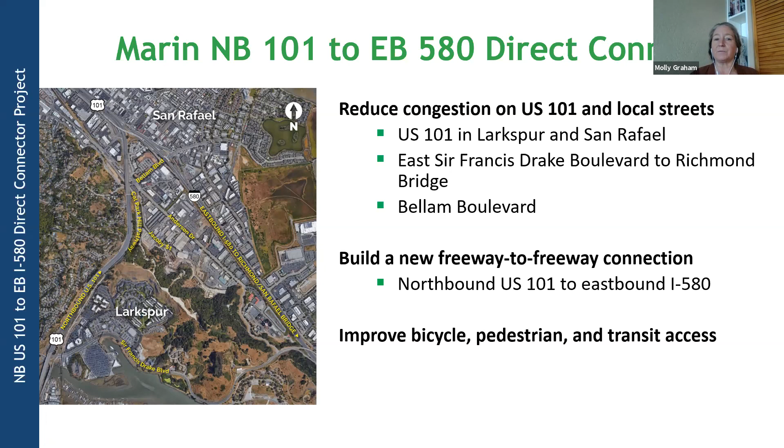This project has been under consideration for a long time. The Richmond-San Rafael Bridge is a toll bridge, and it's one of the only toll bridges in the Bay Area that doesn't have a freeway-to-freeway connection. Funding was secured both in our local tax measure and for Regional Measure 3. The upcoming work is to identify alternatives and do a very thorough environmental analysis. We are even pre that phase, doing outreach and talking to folks before that is important, and we will continue the outreach as we go into the environmental process.

Sorry, Dan, just backing up - we have engaged a stakeholder working group. Kate, thank you for being part of that, and Linda Jackson, I see you're here as well. I'll go into more details on that. We're working with Caltrans, and also part of the project is to develop conceptual, high-level design work for the opposite connection, which also doesn't exist: westbound 580 coming into Marin, and then southbound 101.

All right, Dan, thank you. So this is the targeted project schedule. As mentioned, we are currently in the project development phase, working on consensus building, and then environmental scoping, which is the term to kick off the environmental process. That would occur later this year. Once that's finished, you determine a preferred alternative, the design that would be built. And then ultimately, final design and construction, shown in the box in green.

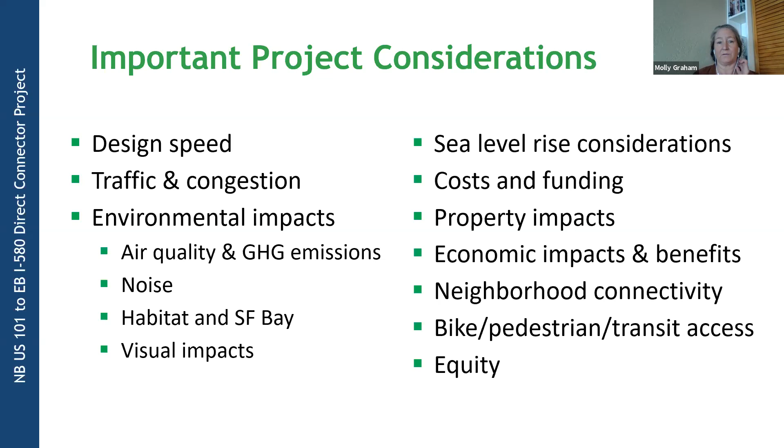I mentioned a little bit of this earlier. The project funding, Regional Measure 3, was voted on throughout the 9-county Bay Area for toll bridges to provide additional funding for specific projects, and this is one of them. $135 million was approved in that, and unfortunately Regional Measure 3 is held up in litigation right now.

It's with the California Supreme Court awaiting hearing, and ideally all that money, which is being collected and held in escrow, will be resolved in the near future so we can have that $135 million to contribute to this project. There's also local funding from our local sales tax, also voter approved, about $16.5 million for our local efforts and interests.

And I think from here, do I turn it over to Dan? Yes, now we get to what I call the spaghetti map — the alternatives that we have, there are 7 currently being considered. So Dan, I'll turn it over to you, and thanks everybody again. Thank you, Dan. Molly, take it away.

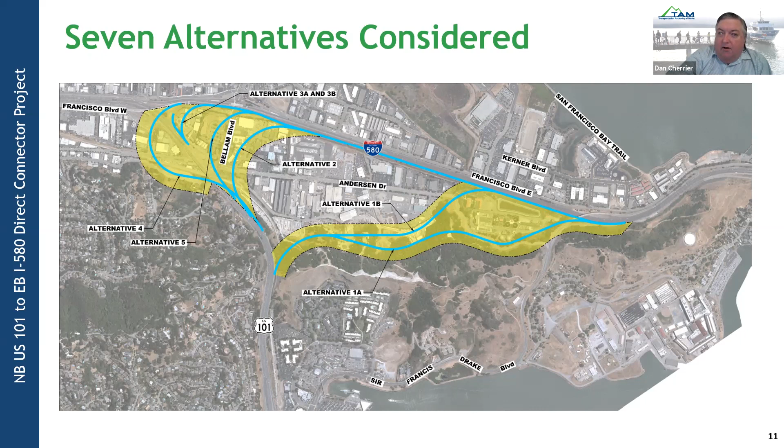Alternative 1A starts off at the top of Cal Park Hill. It goes across the hillside. It has to cross over a roadway that accesses the hillside. Anything in orange is a bridge structure, anything in green is on the ground. Obviously a lot of deep cuts and deep fills here. It goes to the east of the sanitation district, and then goes on to I-580 after that.

One thing about all 7 alternatives we'll be discussing here is they all have an auxiliary lane on I-580 from wherever the alternative joins 580 to join the current auxiliary lane that comes on from Sir Francis Drake to approach the bridge. That's the right lane as it approaches the bridge, all the way onto the bridge. That means the Sir Francis Drake on-ramp will revert to being a standard on-ramp with a normal merge.

So this is 1A. This structure, this one orange structure over here on the left, as you can see in the profile view, is 60 feet from the bottom of the road - from the top of the roadway surface to the bottom of the bridge structure - and then a 20-foot high bridge over Anderson. What you're seeing here for the cuts and fills, we have exaggerated the vertical scale so you can actually see it.

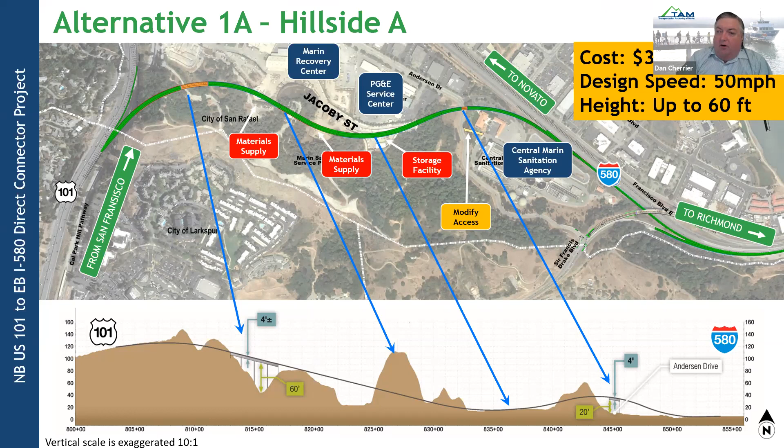So here, that arrow to the right shows where that first bridge structure is, and then it winds behind MSS, which is the Garbarino recycling facility, and this is what the right half of it will look like.

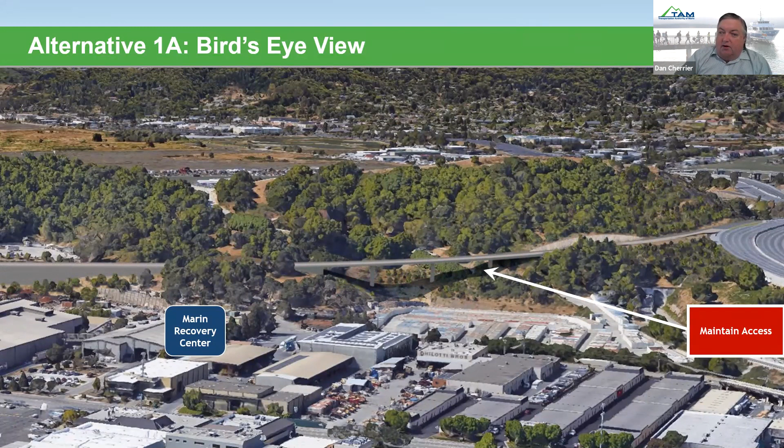Alternative 1B is further up the hillside. We did this for a couple of reasons. One was to see if we went further up the hillside, would it have less of an impact on the MSS facility? We don't want to go all the way to the top of the hillside because then it can be viewed from the residences that are on the opposite side.

And then it goes on the other side, as you can see, of the Central Marin Sanitation Agency. It now goes on the west side, so it'll have less impact on their operations. It will touch down to 580, unfortunately, right where the Sir Francis Drake on-ramp is right now, and off-ramp. So it will necessitate rebuilding both of those ramp structures, and we'll have to realign slightly how Anderson comes into Sir Francis Drake.

The actual structure over that roadway on the far left there, right after it starts, is a little less high because you're further up the hill. You don't have to span as much height between the ridges because you're further up the ridge. When I say it does have less impact on MSS - otherwise it's pretty much the same thing. It starts in exactly the same place.

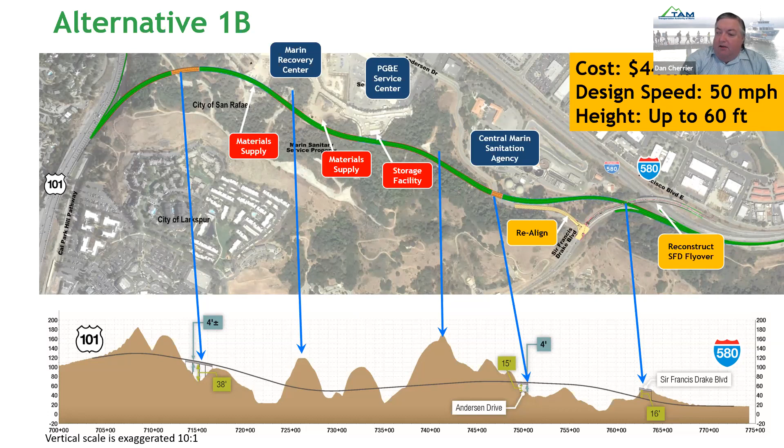Here is a photograph of kind of how it looks, and we'll go from there.

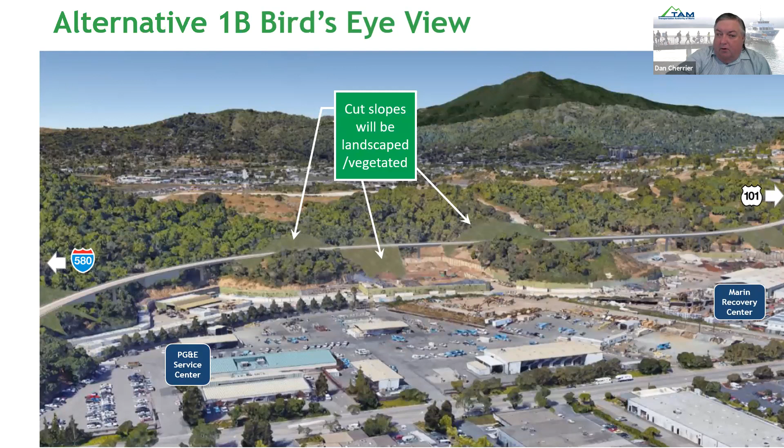Let's see, this is how both of them take off from Highway 101. This is northbound Highway 101, this is northbound Highway 101, and they would both pretty much start in the same location. But this kind of gives an idea of how they would take off.

Both of these are the highest cost of all the alternatives, and they probably have the largest environmental impacts because of the habitat and species and other resources that are up here on the hillside. So moving along to alternative 2, this is the one that goes down Simms Street.

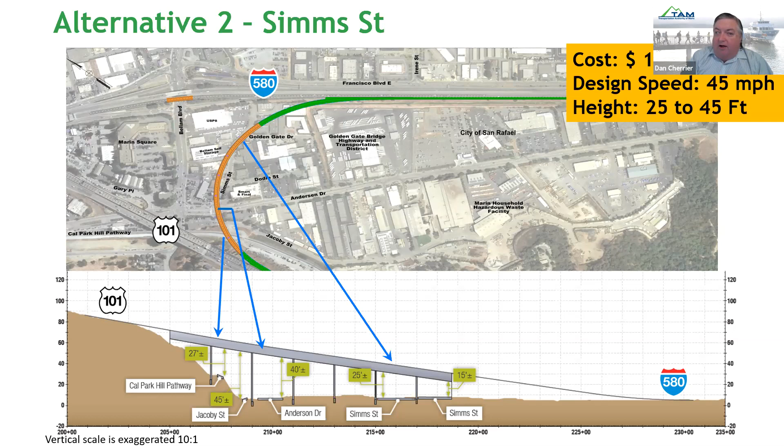Plus, it's right on the side of Simms Street, so you can see that coming all the way down. It does have a long structure section, pretty much all the way from before the train tracks to practically where it is going to go to I-580. Here's a photograph of a rendering of it crossing the train tracks and the bike path before Anderson is off there to the right. Like I say, it's pretty high where it crosses over Anderson.

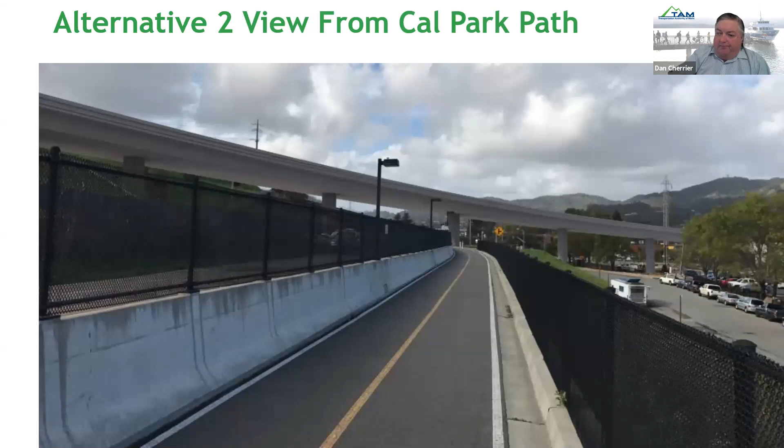The next view. Next alternative is 3A. Call this the low speed A. The reason we call it low speed is as you're coming down the hill here, the space you have to get turned around gets tighter and tighter, so the design speed gets lower. Well, we have a table after all of these that'll show how the design speed works, but basically it goes just east of the current Bellam Blvd off-ramp. You see that the Bellam Blvd off-ramp off to the far left.

What would happen is you'd have a double lane exit. All these have a double lane exit. And then the Bellam Blvd off-ramp would go off to the left of the direct connector shortly after the gore point. It does have an odd profile because it has to get high enough to go over the I-580 exit to Bellam. So the highest part of the structure is actually where it crosses the I-580 off-ramp, not where it's crossing Bellam itself. So it gets kind of a weird profile in that it raises up fairly quickly and then starts dropping down the rest of the way, including the part over Bellam.

Like I said, one thing is an auxiliary lane, no matter which one we start, happens at wherever the touchdown is. So in this case, that third lane going eastbound I-580 would start at the moment this will touch down. And it does have a non-standard feature in that Bellam Blvd comes off on the left of the ramp. So the structure over the Bellam Blvd off-ramp, as you can see, is about 16 feet over that structure, which is the minimum required by highway standards.

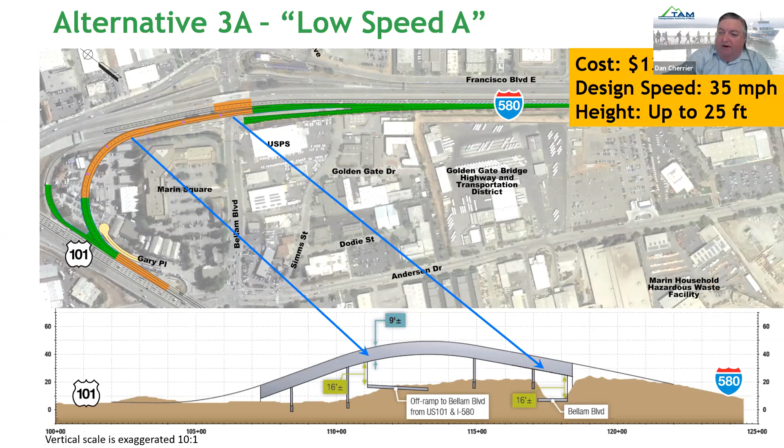One thing you will notice is an extra set of orange over here, and we'll get to this in a minute, but no matter which option we're doing, the Bellam Blvd undercrossing structure, where I-580 goes over Bellam, is going to be replaced to match, if you remember, TAM about 12 years ago replaced the westbound structure, and we were able to get rid of the column in the middle and widen out this structure. So no matter which alternative we do, it will have that one thing done, even if it's up on the hillside. So here's kind of a picture of what that would look like.

You can see the Bellam Blvd off-ramp going to the left of the direct connector. And you can see that there are some right-of-way impacts. That part in green, that little grassy area, that is currently owned by Caltrans and leased to some businesses that are back there at the end of the Gary Place roadway. I think there's a place that makes masonry tile and a couple other businesses that would be impacted.

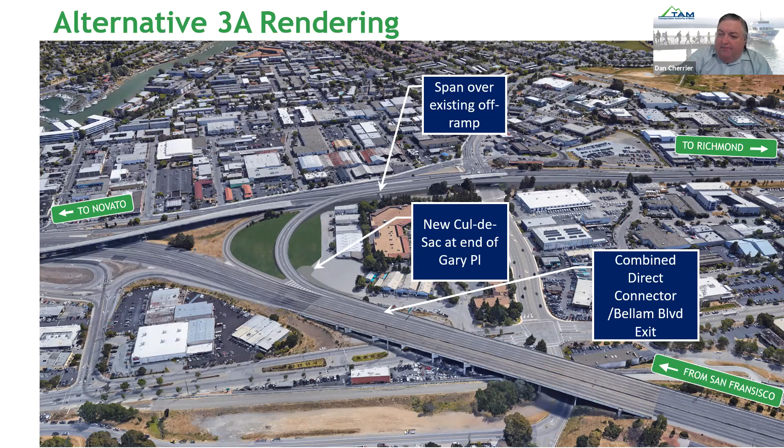Alternative 3B is the same thing, but it doesn't have nearly the profile. It actually will cross Bellam Blvd at the same height as the Bellam Blvd undercrossing is right now. And it does have the Bellam Blvd off-ramp on the standard right side of the direct connector. So basically all of the Bellam Blvd loop that is there right now would cease to exist.

However, it does necessitate closing the Bellam Blvd off-ramp from I-580, which will mean that people that need to access anything on the opposite side of the I-580 freeway, including all the people that live in the canal area, would have to exit at Francisco Boulevard West, which is the next exit up from I-580 going southbound, come down to Anderson, make a left turn, and then make a left turn on Bellam. This is something that we've heard from the community so far that is just not going to work for them.

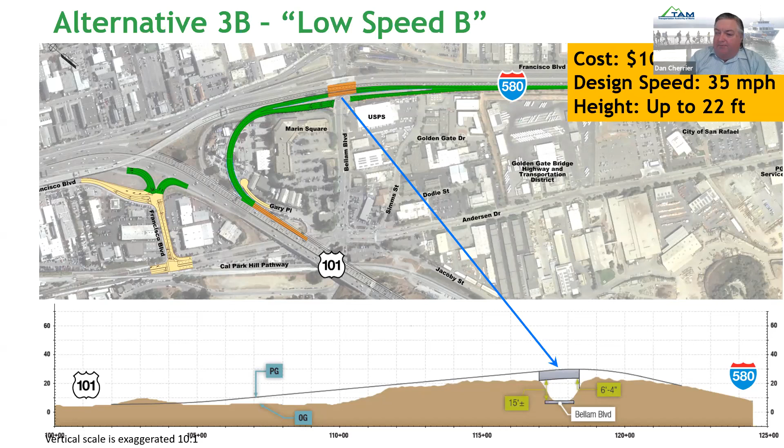We're also looking at a possible revision to this where we can maintain the I-580 off-ramp, and actually the I-580 off-ramp goes over this structure. It has a separate area where it will touch Bellam Blvd, to see if we can still keep elements of this alternative. So here's what that would look like. You can see there's almost no structure involved here at all. The only structure is where it crosses over Bellam Blvd here, at the same height as the existing structures.

This is actually the lowest cost alternative. The 135 million you saw that Molly referenced a few minutes ago for alternative 3A, that's the one that goes over the Bellam Blvd off-ramp. That is the 135 million one that we actually put into RM3, but that was just a placeholder at the time. It didn't necessarily mean that that's the one we were going to choose. We had to put something into the application for those funds.

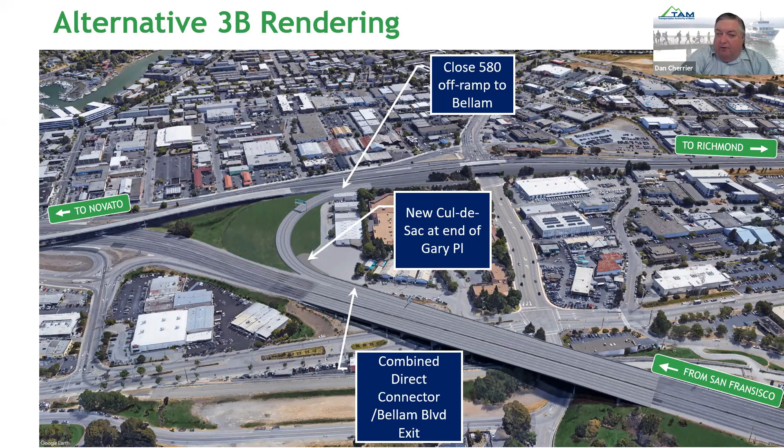The last one, one more after this: Alternative 4 is the swing out option. This is the most structure intensive one, and it does have a little higher design speed. The reason it was included is this is the one that does not impact right-of-way.

You can see all these businesses here on Simms, near the Marin Square structure, actual businesses are not impacted. These businesses leasing the area from Caltrans are not impacted. It goes more or less down through an open marshy area here, but just to the other side of the railroad tracks. It goes over Francisco Boulevard West.

Unfortunately, it does also have to close the I-580 off-ramp, and this is probably the one we've heard the most negativity about. It's one big concrete structure with pretty much some pretty high areas where it's crossing over 101. It has to cross over 101 twice. It's a big structure going down Francisco Boulevard West.

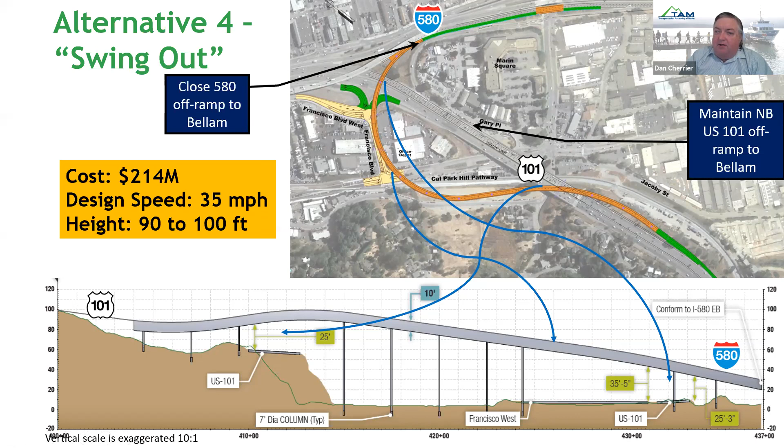I haven't heard a lot of good feedback on this, so much so that those visual simulations we showed you, those are very expensive. We decided not to do one for this one.

So that takes us right to Alternative 5, which is what we call the medium speed. It leaves just at 101, just about the same place Alternative 2 did, but instead of going down Simms, it has a more gradual curve that goes through the parking lot of Marin Square.

So obviously it has some right-of-way impacts. It does miss the post office, it just clips one side of it, and it would not affect the Bellam Blvd ramps at all. They would be on a whole separate structure.

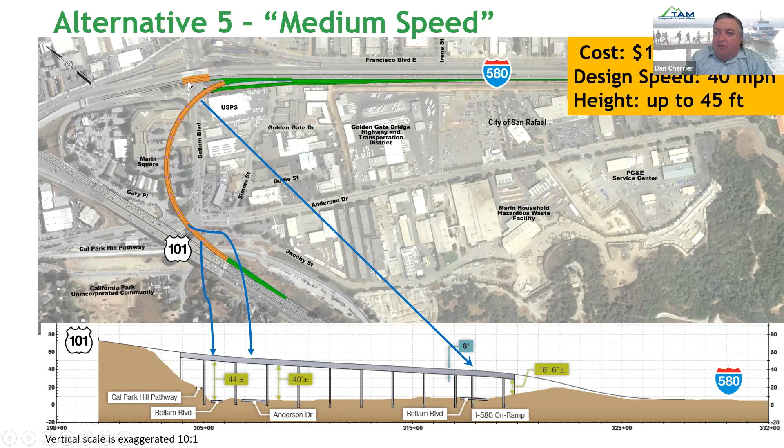It does get pretty high where it crosses Anderson, it's 43 feet, I think. But we can maintain the Bellam Blvd off-ramp and all that. You notice in this one, even though it's not affected at all, we're still replacing the Bellam Blvd structure.

So this is kind of what that would look like. You can see it going right through Marin Square. So far, this one hasn't got a lot of positive feedback, but it hasn't got nearly the negativity that we had on Alternative 4. Alternative 4, you can see it's pretty good in this picture.

In the very bottom of this photograph, you can see this open area here. That's where the structure would have gone for Alternative 4, and then gone down Francisco Boulevard West there on the far left side of the picture, and then kind of crossed back over 101.

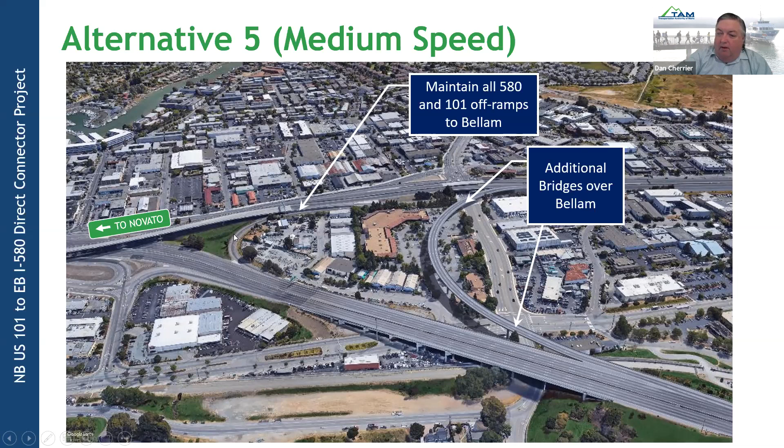So this is kind of all of the alternatives put together, all 7 of them. You can see that the only ones that meet the Caltrans standard for design speeds are at the top, but they're by far the most expensive.

Alternatives 3B and 4 are the two that have to close the off-ramp from I-580 to Bellam Blvd. Alternative 4 was the one that had the minimal right-of-way impact, so most of that cost is due to the structure. For Alternative 2, most of that cost is due to the right-of-way we would have to buy.

Alternatives 1A and 1B are the ones that had the most environmental impacts, but of course, visually, Alternative 2 has some very major visual impacts, and probably so does this swing out, and I would say also the medium speed, the visual impacts are high too. Only 3A and 3B have minimal structures involved, of course, 1A and 1B have somewhat minimal structures.

So that's kind of a synopsis. Like I say, we only have the 135, and that's why we had done 3A as part of the RM3 application. If our process ends up with one of the more expensive ones, the schedule Molly's shown would probably have to be delayed a little bit while we seek out additional funding.

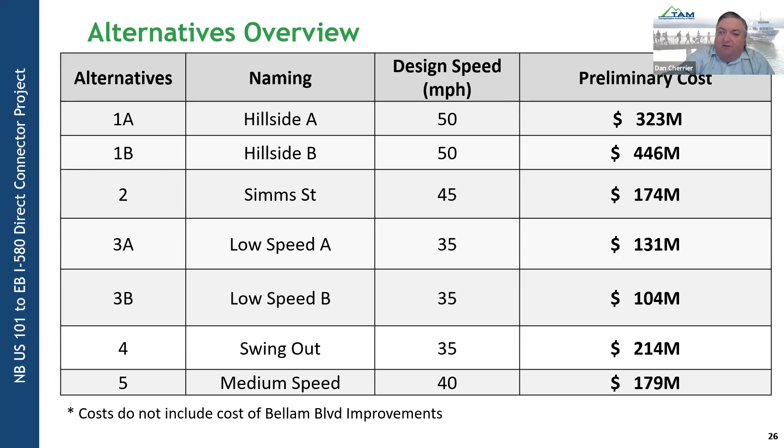We've taken all this out of here, but this is the travel time savings you would have. It shows, one of our concerns when we first were doing this was, are we going to spend all this money and it's still quicker to go down Drake, and people aren't going to use this thing?

And we pretty much found out that if you go to 2040 modeling, the Drake travel time, or taking Bellam, is going to be around 15 minutes. But the direct connector, if you build the ones on the hillside, will be about a little over 5 minutes.

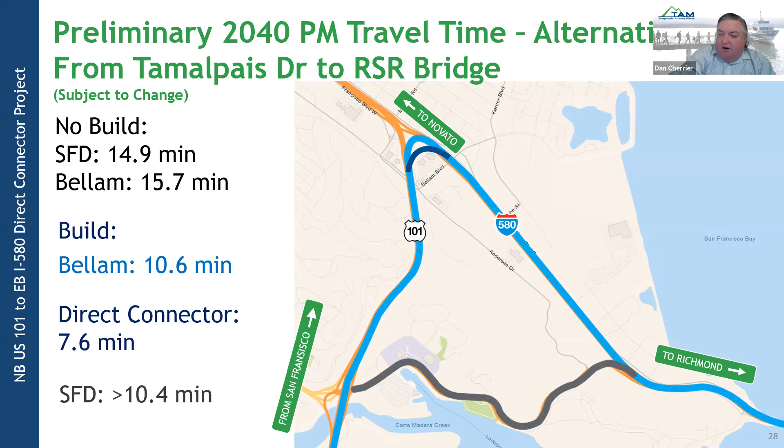If we build the ones down towards Bellam, it's obviously the same to take Drake or Bellam, but the direct connector will be 7.6 minutes, which is still a major time saving. So that concern was addressed.

One of the things Molly talked about is, no matter what we do, we want to make sure it does not impact the opposite direction. We don't have any money right now to build the other way, but we want to make sure that whatever we do, we can build the other direction. And this is showing that we can. This is alternative 3A, shown with a conceptual design for the opposite direction.

One thing, no matter what we do, is that the on-ramp for the other direction is going to be too close to the current Sir Francis Drake off-ramp. So we're going to have to braid those ramps to allow this traffic to merge and not get in the way of people crossing over to get to Sir Francis Drake. Obviously, this is years down the road. We don't have any plans or funds for this now.

We have another alternative that would go with the ones up on the hillside as well. By the way, alternative 4 also has a major problem in that we could not figure out a way to do the opposite direction. So alternative 4 is having a great deal of issues.

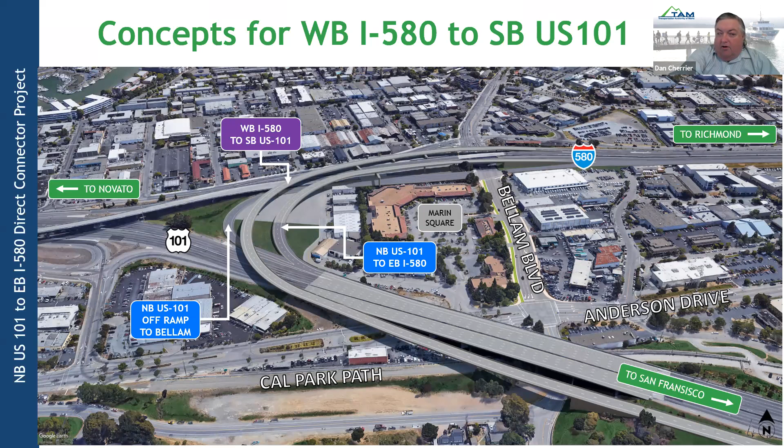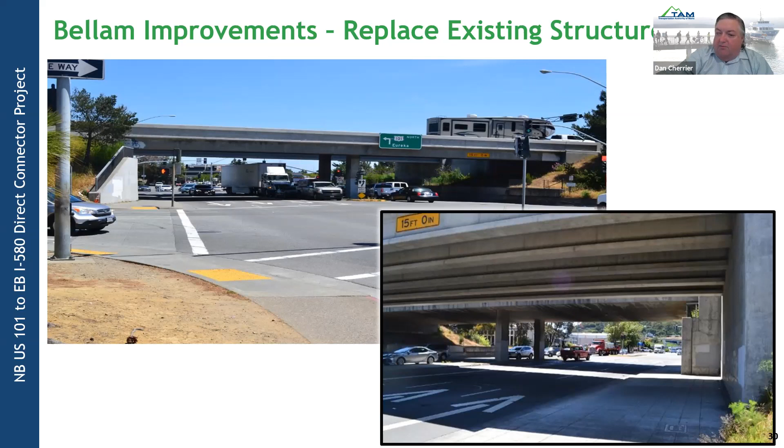We would do the same thing on this project. That'll allow removal of those two columns you see in the main picture that really don't allow San Rafael to come up with different ideas of how to apply solutions to the traffic. Also, we left that abutment on the lower right there, the near one, as a blank wall, and didn't put any kind of scalloping on it, in case San Rafael one day would like to install some kind of mural there, and that possibility will still exist, but at a greater scale.

The other thing we're kind of committing to, even though it's not necessarily tied into the project as much—this is part of that extra 16.5 million you saw in there—is to improve the bike and pedestrian access on Bellam between Anderson and Francisco Boulevard East. If you remember when we did the structure going the opposite direction over Bellam, the Bellam Boulevard eastbound undercrossing, we did significant improvements in sidewalk widening along Francisco Boulevard East down to Medway and along Bellam Boulevard down to Kerner. These would improve those same improvements and add additional areas for bikes as well.

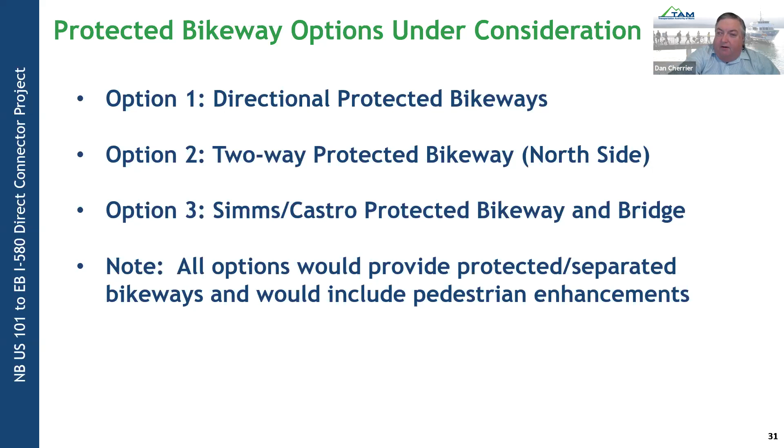We have a few options right now: bikeways on both sides, bikeways on one side, or a separate structure over I-580. So far, the bikeways on both sides are getting the most positive feedback from the various groups.

Molly showed how many stakeholder working groups we've had, how many places we've gone to meet, quite a few. We've had our ESC and our TAC, and we've got tons of comments. This slide is showing what some of those comments are that we're hearing universally over and over again. As I've mentioned several times, the Bellam Boulevard closure is just not something that the community can get behind at all. Those improvements I mentioned on Bellam Boulevard—the bike and pedestrian improvements, as well as replacing the eastbound structure—have gotten a lot of good feedback.

Some concerns, especially early on, that we weren't addressing equity, and we've taken some steps to address that, making sure the impacts on local neighborhoods are better thought out. One thing I do want to point out, though, is we're early on. We haven't even started the normal process yet where you would begin a project like this. We're just getting early feedback from everybody in the area to see what some of the concerns are, so we can best go through the Caltrans process and not spend a lot of resources on an alternative that no one's going to want when we get to the other end of it.

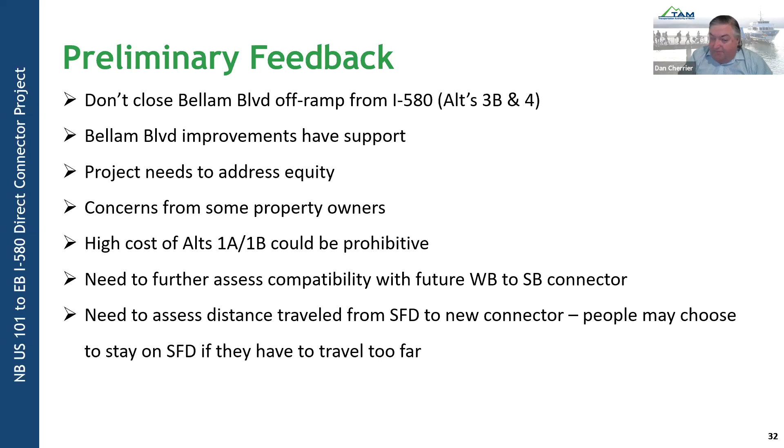One question I wanted to ask you, Dan, is are the Bellam Blvd improvements included in the funding from Measure AA and RM3? And also I was wondering whether the Bellam Blvd improvements are part of the environmental review of the project. Are the two projects going to be considered together or separately, both for funding and environmental review?

Yeah, it's all one big project, and it'll be one environmental document. Okay. It's just that if you're building something up on the hillside, replacing the Bellam Blvd structure doesn't seem to have much nexus, and we want to make sure that got included. So that's always been in our plan, even when we talked about the RM3 options, and the cost of that has always been part of the $135 million.